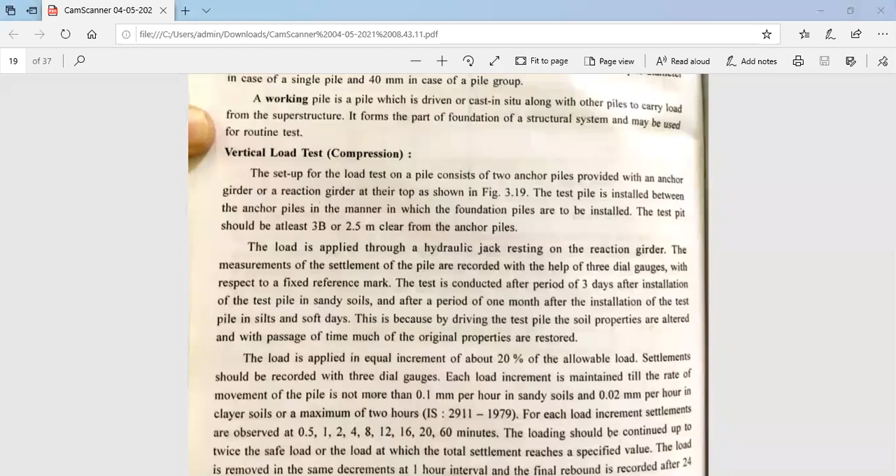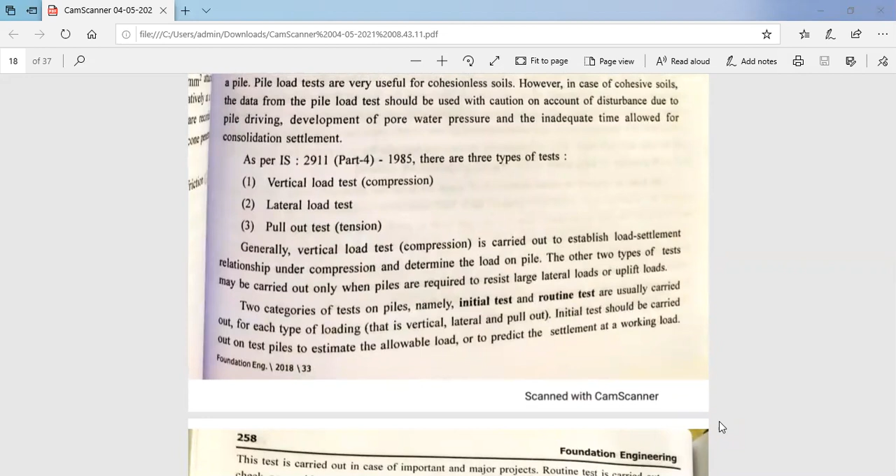So last time we learned about this vertical load test, which is known as a compression type of test, right? First is a vertical load test, second is lateral load test, and third one is a pull out tension, right? So in that case, first test is a vertical load test, right? So vertical load test, which is also known as a compression test.

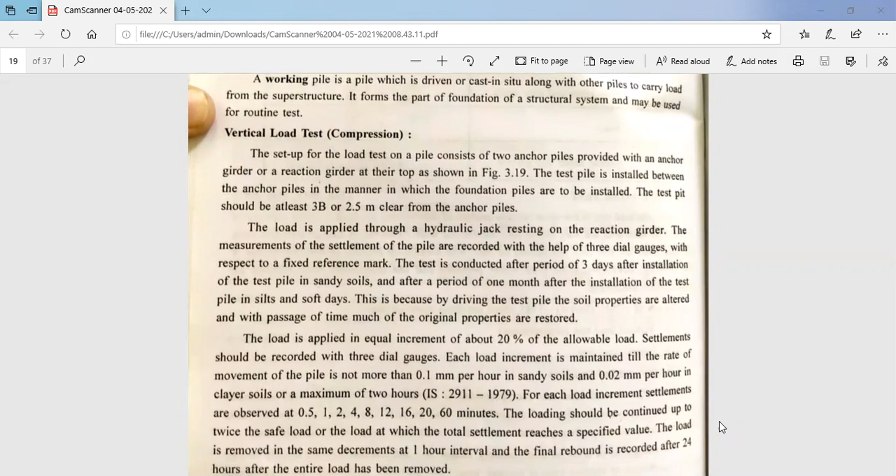So the setup for the load test on a pile consists of two anchor piles provided with an anchor girder or reaction girder at their top as shown in figure. I can show you right there. Okay, like this, right? So the test pile is installed between the anchor piles in the manner in which the foundation piles are to be installed. So then the test pile should be at least 3 times of width, or you can say 2.5 meter clear from the anchor piles.

So the load is applied through hydraulic jack resting on the reaction girder. So the measurement of the settlement of the pile is recorded with the help of three dial gauges with respect to a fixed reference mark. So the test is conducted after the period of 3 days after installation of the test pile in sandy soils and after the period of 1 month after the installation of the test pile in the silts and soft clays. So this is because by driving the test pile, the soil properties are altered, and with the passage of time, much of the original properties are restored.

So the load is applied in equal increments of about 20% of allowable load. So settlement should be recorded with three dial gauges. Each load increment is maintained till the rate of movement of pile is not more than 0.1 mm per hour in sandy soils and 0.02 mm per hour in clay soil, right? Or the maximum 2 hours as per IS code. So for each load increment settlements are observed at 0.5, 1, 2, 4, 8, 12, 16, 20 or 60 minutes.

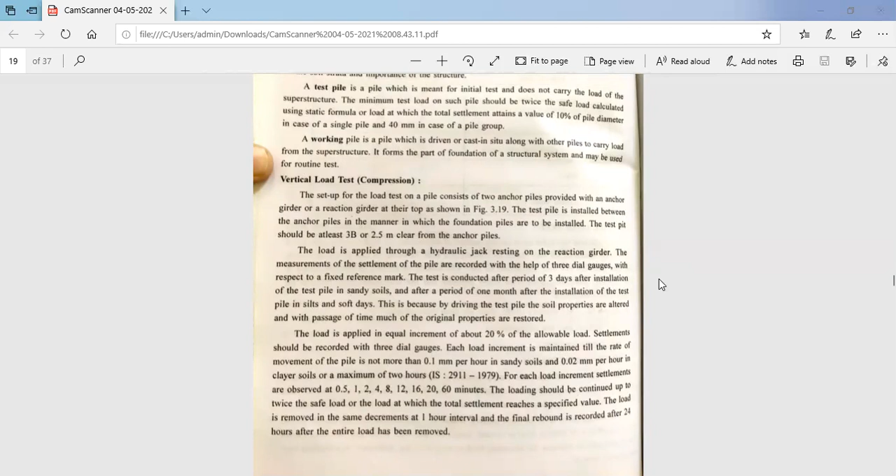So the loading should be continued up to twice the safe load or the load at which the total settlement reaches some specified value. So the load is removed in the same decrements at 1 hour interval and final rebound is recorded after 24 hours after the entire load has been removed. So this is the figure of jack loading, which is reaction by a loaded platform. Arrangement for the pile load test is also shown in this figure.

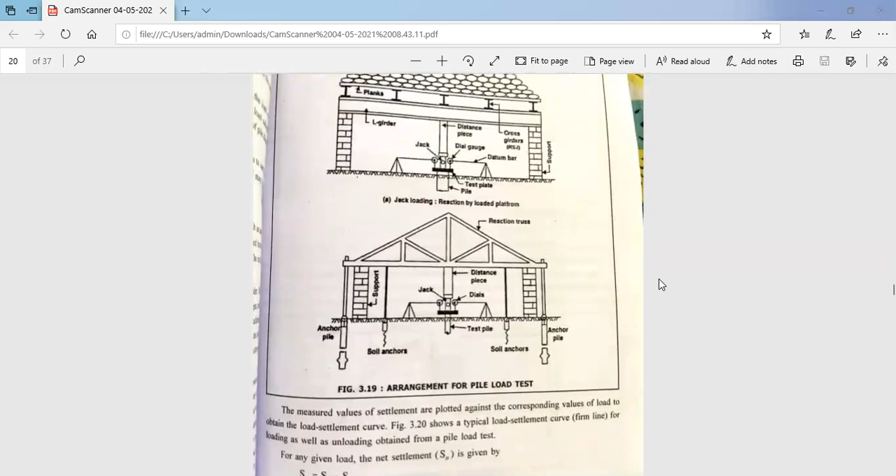Right, there are soil anchors given; this piece at the center is known as a test pile, right? Jack and dial gauges are provided. This is our distance piece, which covers the distance between this reaction truss and the jack, right? Supports on which this whole truss is supported. Anchor piles are given. So the measured values of settlement are plotted against the corresponding values of the load to obtain the load settlement curve as shown in figure, which shows a typical load settlement curve for loading as well as unloading obtained from the pile load test.

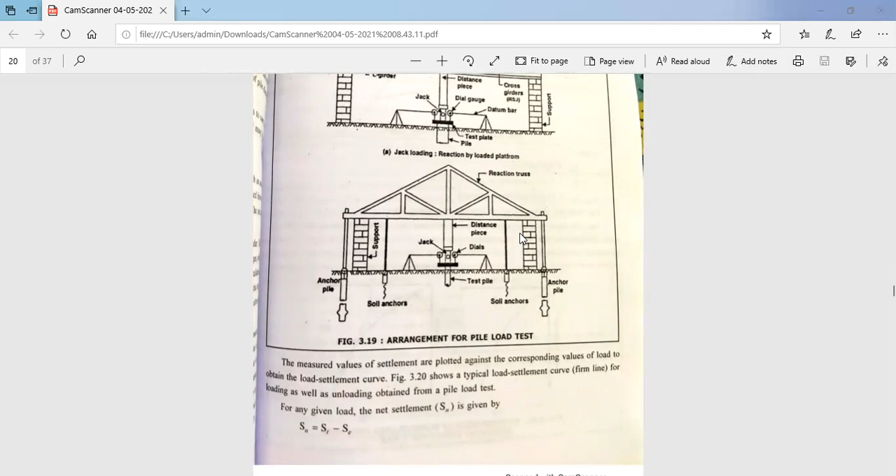So for any given load, net settlement, which is known as Sn, is given by Sn is equal to Si minus Se. Right? So load settlement curve as shown in this figure, right? There are net settlement, gross settlement, loading, settlement; load versus settlement curve is given. So Sn is equal to net settlement, Si is equal to total settlement or gross settlement, and Se is equal to elastic settlement or rebound. So this figure also shows the net settlement, which is the chain dotted line, as you can see in this figure.

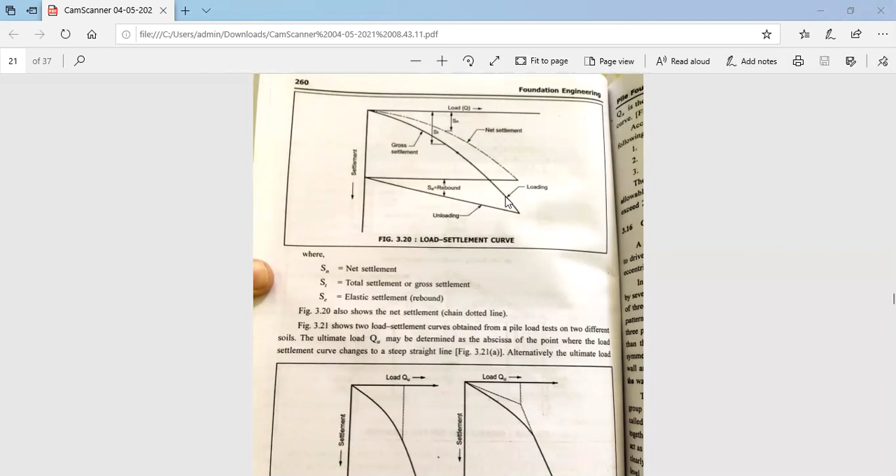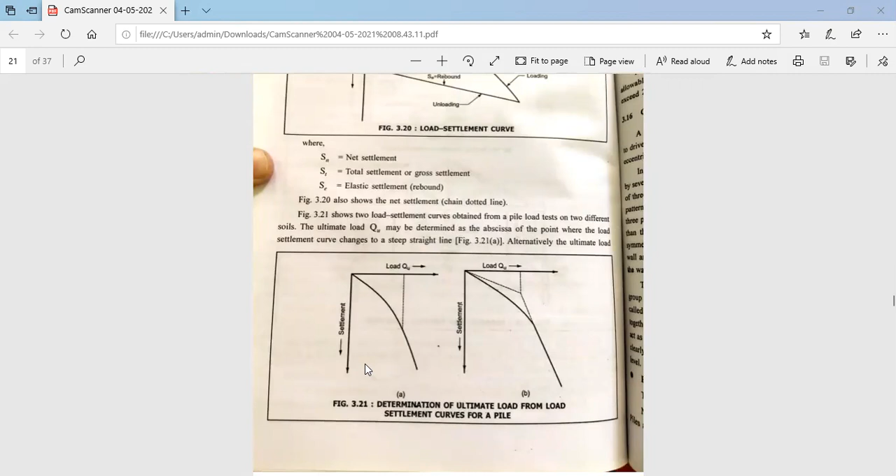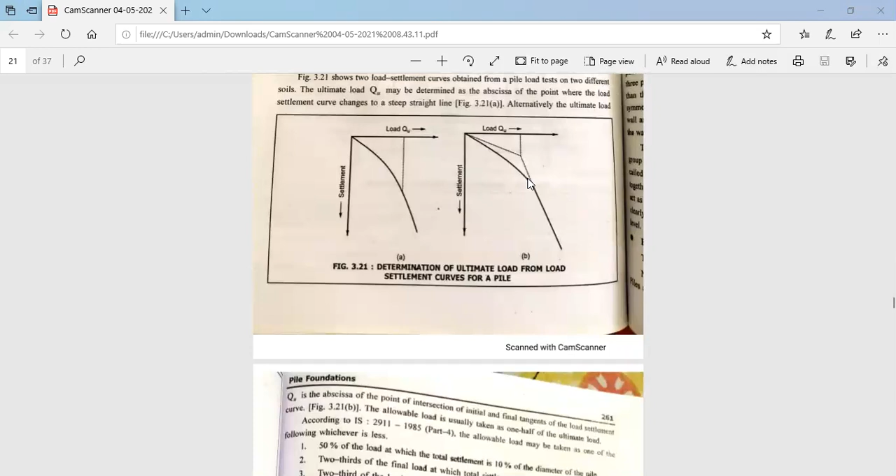And another figure 3.21 shows the two load settlement curves obtained from the pile load test on two different soils. So the ultimate load QU may be determined as abscissa of the point where the load settlement curve changes to a steep straight line, as you can see in the first figure. Alternately, the ultimate load QU is abscissa of the point of intersection of initial and final tangents of the load settlement curve, as you can see in this figure, right? So the allowable load is usually taken as one half of the ultimate load.

Right? So according to IS 2911 part 4, the allowable load may be taken as one of the following, whichever is less. So first condition is 50% of load at which the total settlement is 10% of diameter of the pile. Two-thirds of the final load at which total settlement is 12 mm, and two-thirds of the load which causes a net settlement of 6 mm. So the limiting settlement criteria are also sometimes specified. So under twice the allowable load, net settlement should not exceed 20 mm, or the gross settlement should not exceed 25 mm.

So talking about group action of piles. So a pile is not used singly beneath a column or wall, because it is extremely difficult to drive a pile absolutely vertical and to place the foundation exactly over its center line. So if eccentric loading results, the pile may fail structurally because of bending stresses. So in the actual scenario, structural loads are supported by several piles acting as a group. So a minimum number of 3 piles is used under a column in a triangular pattern, even if the load does not warrant the use of 3 piles.

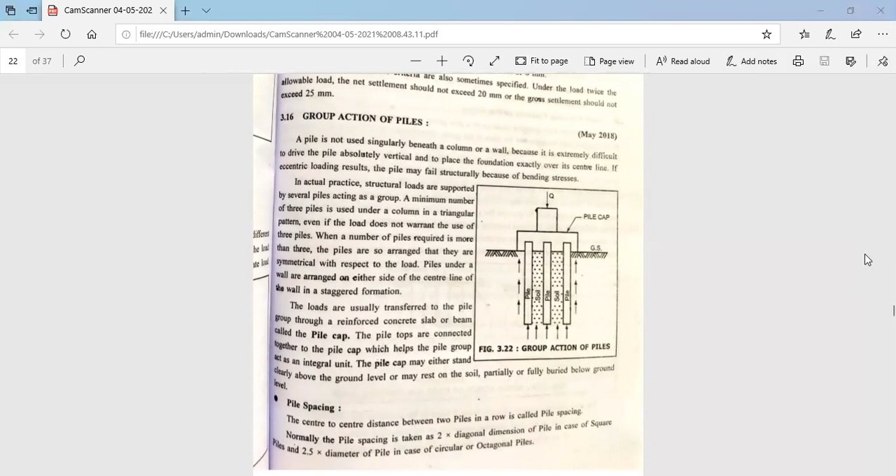And the pile tops are connected together to the pile cap, which helps the pile group act as an integral unit. So the pile cap may either stand clearly above the ground level or may rest on the soil, partially or fully buried below the ground level, right? Next is pile spacing.

So the center to center distance between 2 piles in a row is called pile spacing, and normally the spacing is taken as 2 times the diagonal dimension of piles in case of square piles, and 2.5 times the diameter of a pile in case of circular or octagonal piles.

Spacing of piles depends on the following factors. First one is the length of pile, load on pile, material of pile, nature of soil in which pile is to be driven, type of pile, pile grouping, and obstacles in pile driving.

The load carrying capacity of a pile group is not necessarily equal to the sum of individual load capacities of piles in the group. So the disturbance of soil during the installation of piles and overlap of stresses between the adjacent piles may cause the load carrying capacity of the pile group to be less than the sum of the load carrying capacities of the individual piles.

However, the soil between the piles may become locked in due to densification from driving of piles, and a group may tend to behave as an equivalent single large pile, right? So densification and improvement of properties of soil surrounding the group may also occur.

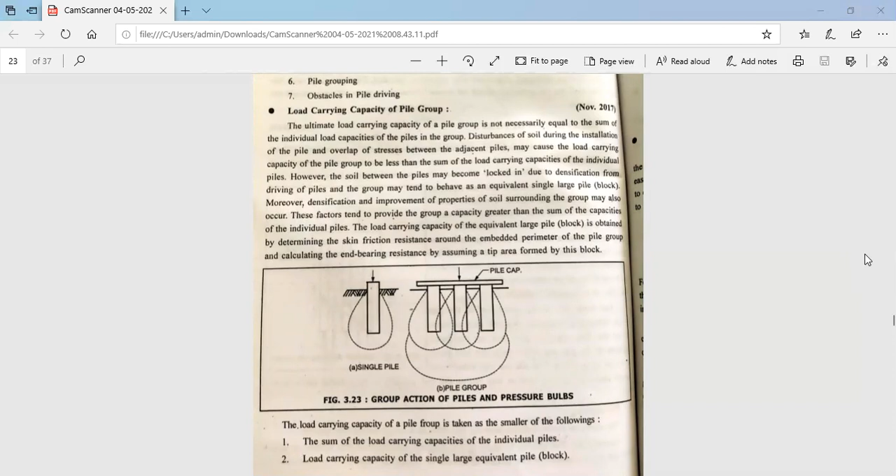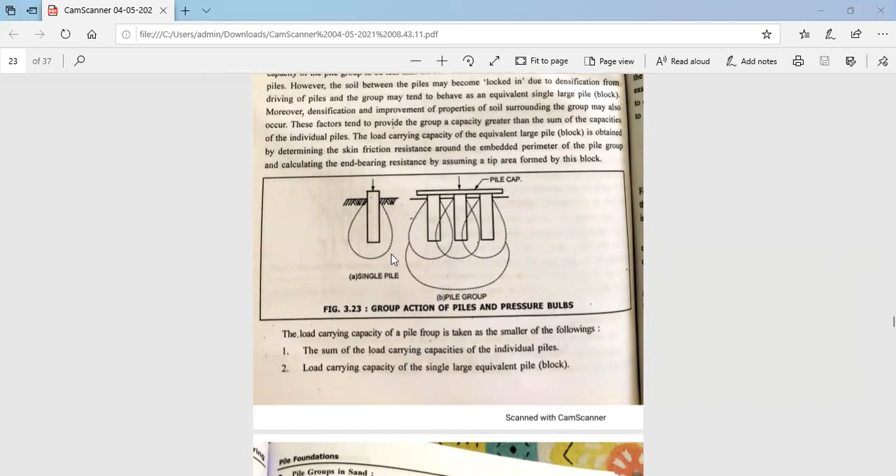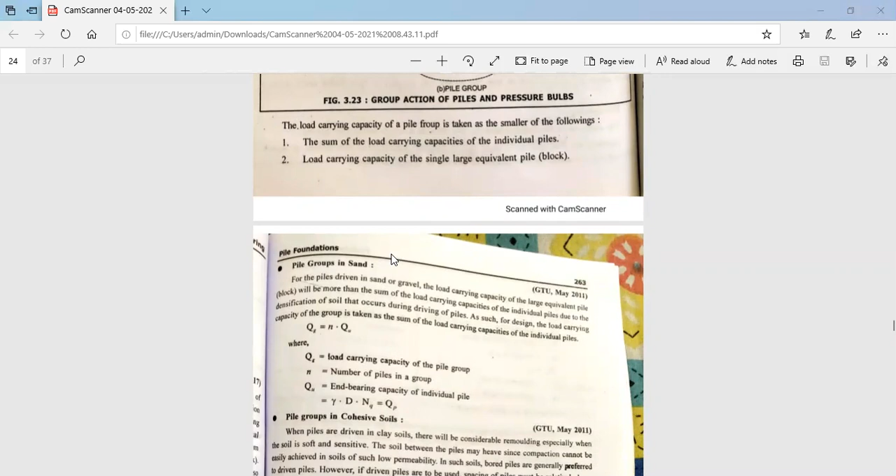Okay, so in the figure given, there is a single pile, and on the other side there is group action of piles, right? So the load carrying capacity of a pile group is taken as the smaller of the following: the sum of the load carrying capacities of the individual piles and the load carrying capacity of a single large equivalent pile.

So for pile groups in sand, piles driven in sand or gravel, the load carrying capacity of the large equivalent pile will be more than the sum of load carrying capacities of the individual piles due to densification of soil, which occurs during the driving of the pile. So for the design, the load carrying capacity of the group is taken as the sum of the load carrying capacities of the individual piles.

So the equation is QG is equal to N into QU. QG is the load carrying capacity of the pile group, N is the number of piles in a group, and QU is the bearing capacity of an individual pile. And QU is equal to gamma into D into NQ, right, which is equal to QP.

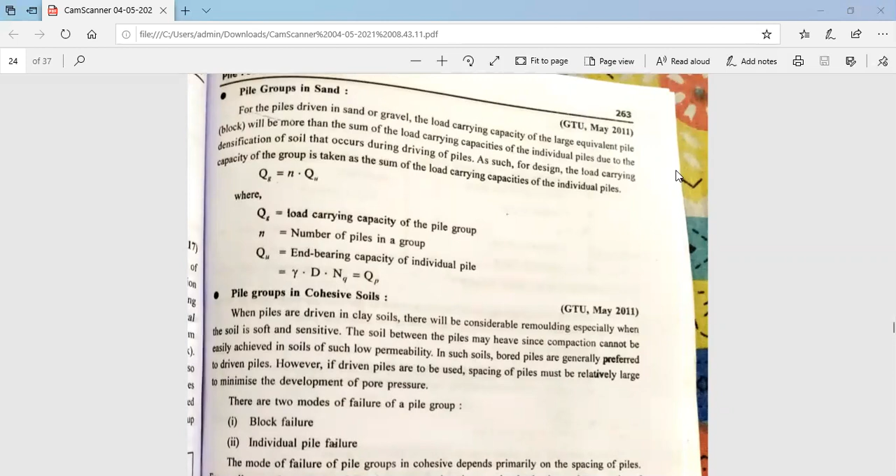So when the piles are driven in clay soil, which is a cohesive soil, there will be considerable remodeling, especially when the soil is soft and sensitive. Compaction cannot be easily achieved in such soil due to low permeability. So in such soil, bored piles are generally preferred to driven piles. If driven piles are used, spacing of piles must be relatively large to minimize the development of pore pressure.

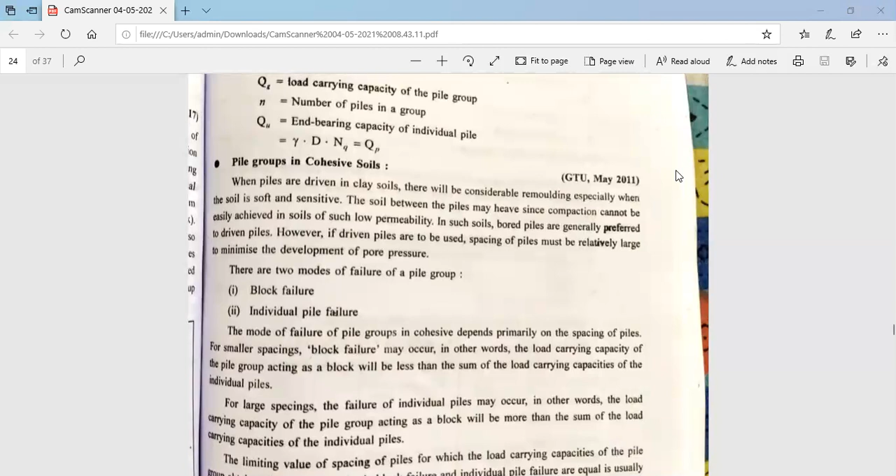So there are two modes of failure in a pile group. First one is block failure, and second one is individual pile failure. The mode of failure of a pile group in cohesive soil depends primarily on the spacing of piles, and for smaller spacing, block failure may occur. In other words, the load carrying capacity of the pile group acting as a block will be less than the sum of load carrying capacity of the individual piles.

For large spacing, failure of individual piles may occur; in other words, the load carrying capacity of the pile group acting as a block will be more than the sum of load carrying capacity of the individual piles. So the limiting value of spacing for which the capacities obtained from the two criteria, block failure and individual pile failure, are equal is usually considered to be 3b, where b is the diameter of pile.

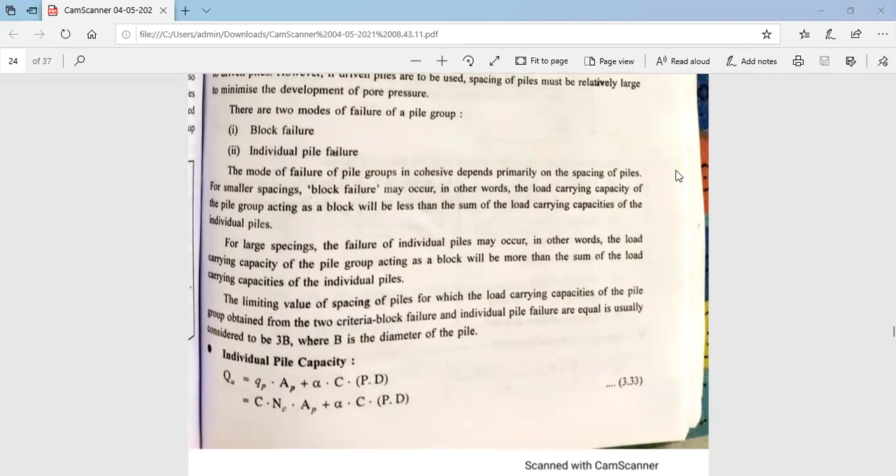So the individual pile capacity Q is equal to small qp into AP plus alpha CPD. The qp value is CNc. So put this value in this equation, and our individual pile capacity is CNc AP plus alpha CPD.

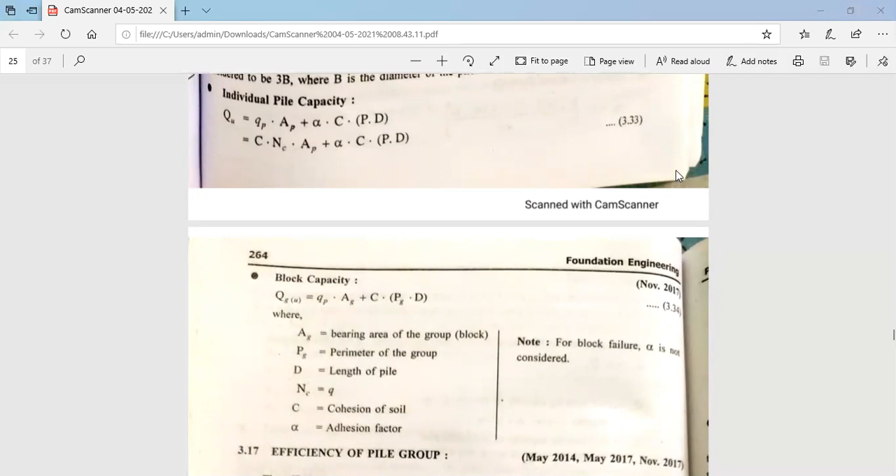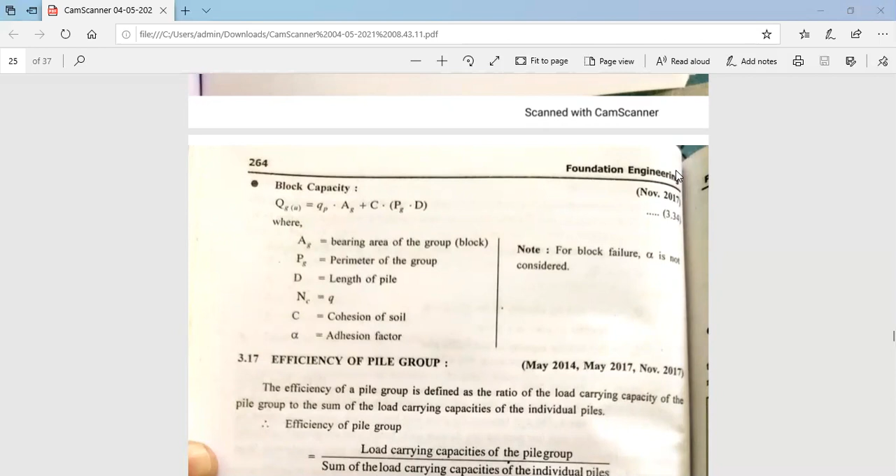So talking about the block capacity, QGU is equal to small qp into AG plus C PG D, where AG is the bearing area of the block, PG is the perimeter of the group, D is the length of pile, C is cohesion, alpha is the adhesion factor, right? Next is the efficiency of pile group.

This efficiency of pile group is basically defined as the ratio of load carrying capacity of the pile group to the sum of load carrying capacity of the individual piles. So the equation is here, right? Eta G is equal to capital QG divided by sigma QU.

So this efficiency of pile group mainly depends on some factors, right? Type of soil, method of installation, spacing of piles, length of pile, diameter of pile, material of pile, number of rows of piles, number of piles in a row, right? And eta G may be greater than 100% for loose and medium sands, and eta G may be less than 100% for dense sands and clays, right?